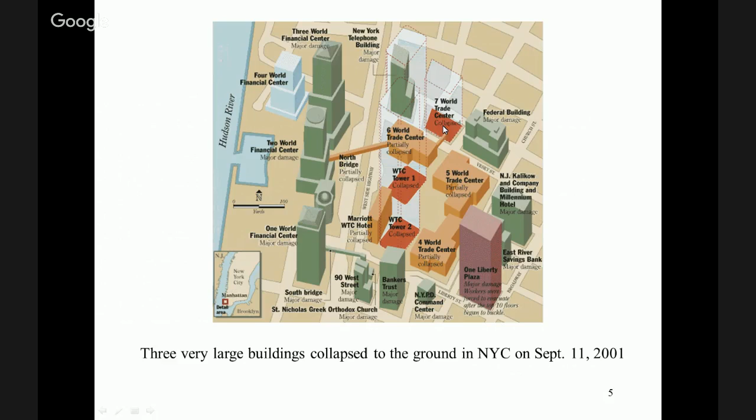So you see here the silhouettes of the 3 buildings that collapsed. You can see the 2 towers; they're in that one block. Building 7 is across Vesey Street. It was 350 feet from the closest tower, which was the North Tower, the second tower that collapsed.

It was shaped in a trapezoidal way. You can see it was 320-some feet on the long side and 247 feet on the shorter side, and then 144 feet wide. A football field is roughly 300 by 150.

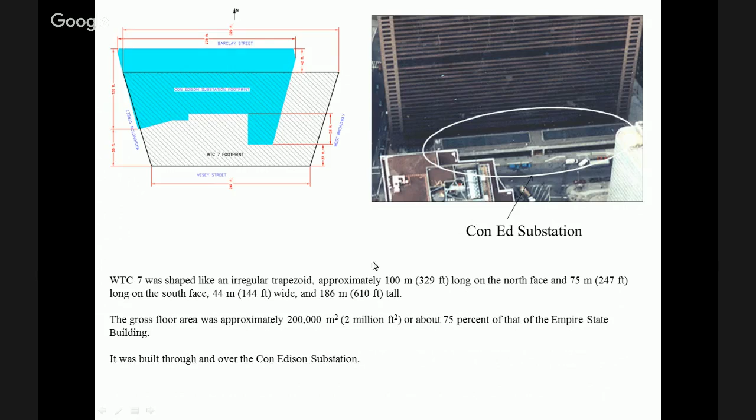It was built through and over an electrical substation. You can see on the right that it juts out — it was like the first 2 stories of the back of the building, the north side. The blue overlay in the upper left is the substation footprint, covering the first 2 stories. You also see the overlay of the foundation caissons showing they were supported through the Con Ed substation. It wasn't a cantilever over the substation — it was built through it. So the substation was essentially like the first 2 stories of the back half, and there was a ramp.

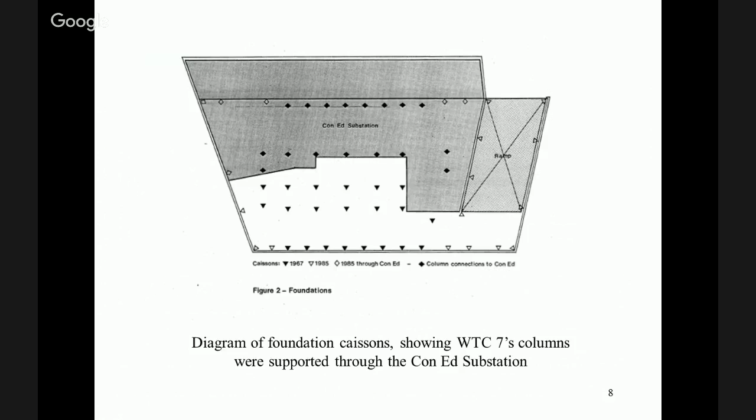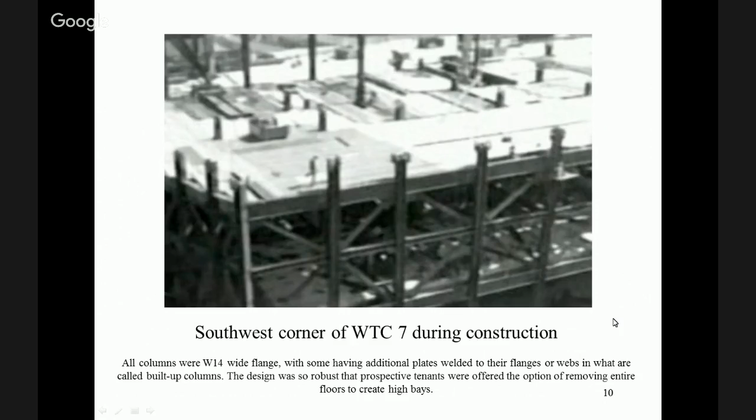The design was so robust that prospective tenants were offered the option of removing entire floors to create high bays, which was done up higher in the building. Here you're seeing half of the building with these two views, looking down the north interior side and the east interior side. Bear in mind you'd also have a south side that was longitudinal and a west side, so you're seeing half the volume of one floor here.

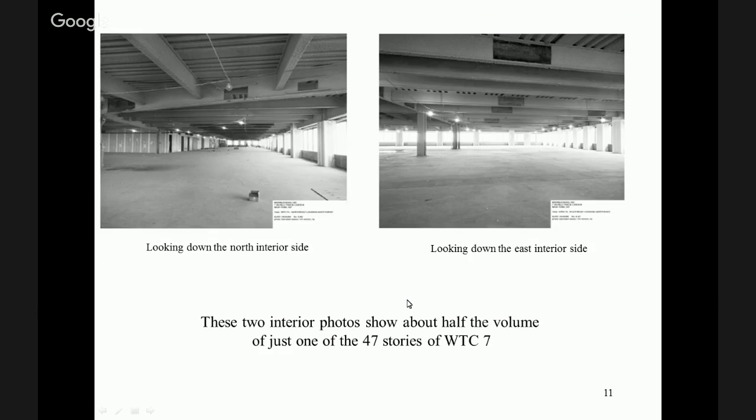There's a video record, we're going to show some videos here, and they're pretty short. I'm going to show these over again, I don't know if it loads well enough. It looked like there was some lagging there. Let me try this real fast. Oh, it still lags, okay. I think everybody gets the idea. Let's see if this one works better.

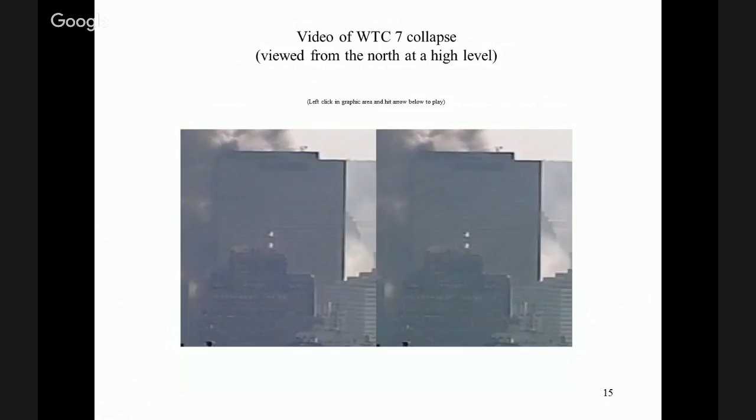And we'll show you this one. This is a high shot, taken from another building, and you'll see the east penthouse go in.

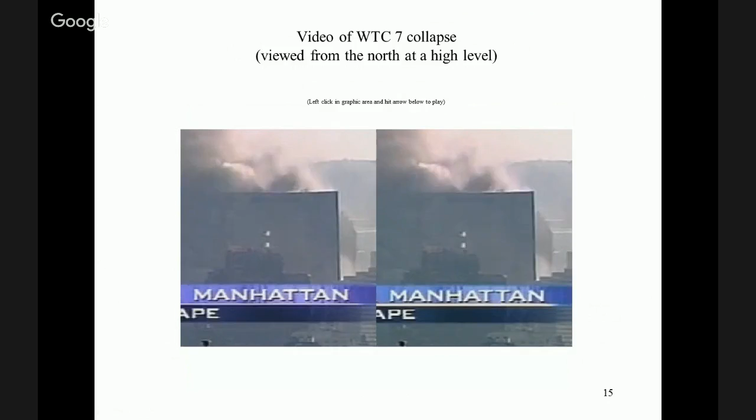The video seems to be lagging, but you can see it, it's actually doing a slow motion. It doesn't collapse that slowly, but you can see that the core isn't all the way down, the interior is not all the way down when the exterior starts to come down. So that's good to see.

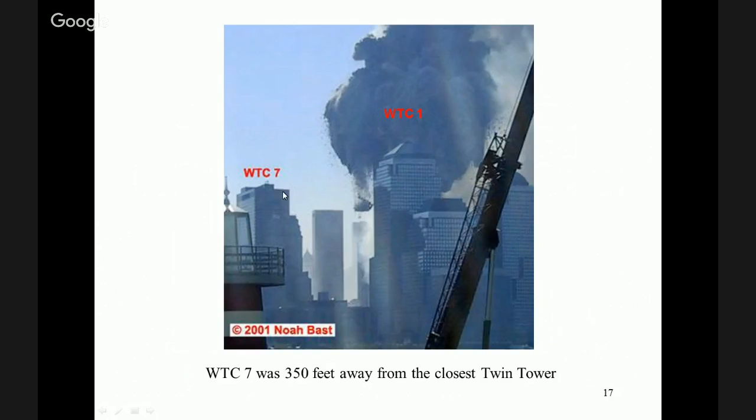Regarding the effects from the Twin Tower collapses, you can see it was 350 feet away. Here's World Trade Center 7, here's the North Tower, also known as World Trade Center 1. You can see a large exterior panel coming off, probably 60 to 80 feet away from the building. It's quite a ways from the 47-story World Trade Center 7, that debris.

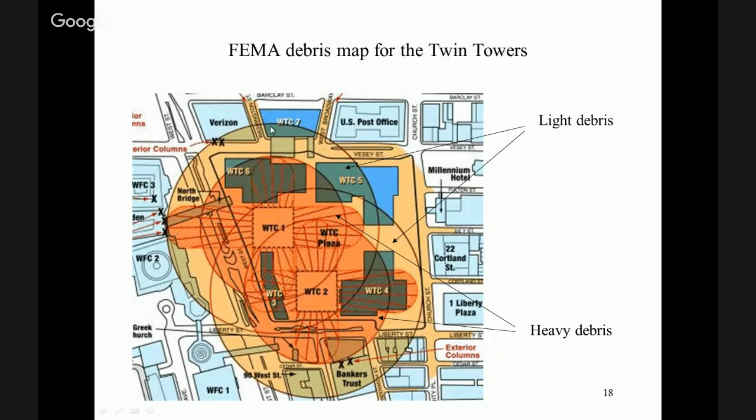This was a map developed by FEMA, the debris map, and you can see World Trade Center 7 is in the light debris zone of World Trade Center 1. These are various pictures from the NIST report showing the damage. There's not tremendous damage. This one, the southwest corner, did take some kind of hit, but bear in mind this building is a football field in size. If a corner of your house got chopped out, a couple feet, it's probably not going to cause the whole house to collapse.

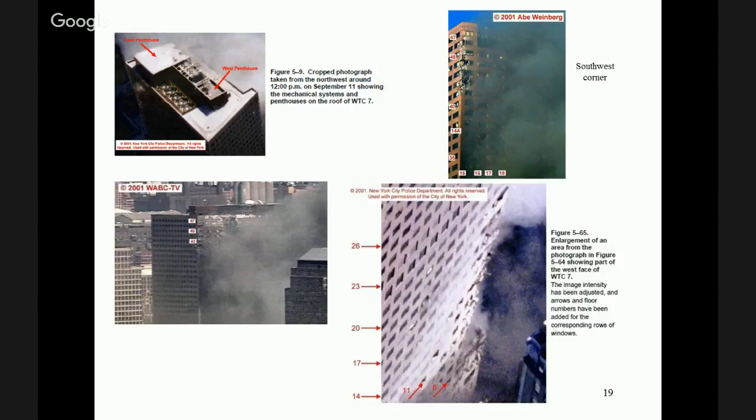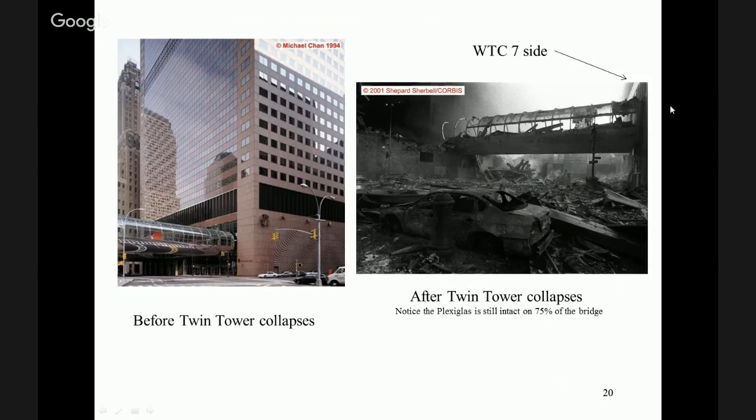Here's the bridge, a walkway bridge from building 6 over to building 7, before the collapses, and here's after the collapse. World Trade Center 7 would have been on the right. You can see that's plexiglass, and much of it is still intact. It would have gotten hit here, and you can see it was blown out. There wasn't much damage over this side.

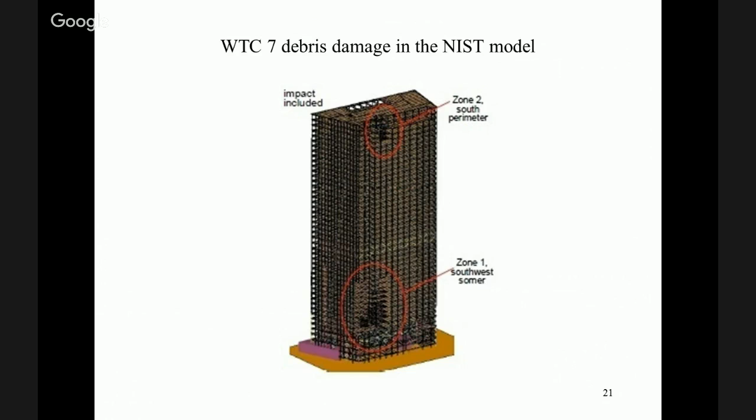They said 7 columns were severed. That's unlikely, you'd have to have a tremendous hit by something like a 10,000-pound item to shear those columns. Those calculations have been done.

This next slide shows other buildings we all know about that took serious damage. Up in the upper left is the Oklahoma City building, which took a serious bomb blast, or numerous bomb blasts, we don't know. At any rate, probably a third of the building is blasted away, and the thing's still standing. Next to that is the Khobar Towers barracks, same kind of thing, a 5,000-pound bomb blew off the face of the building, and it's still standing. The Bankers Trust and the other four pictures are from 9/11.

Serious damage, even the lower ones, World Trade Center 6, 3, and 4 respectively. They were massed, in the same block with the towers, basically right under them. They took tremendous impact damage, and there was no total collapse to the ground.

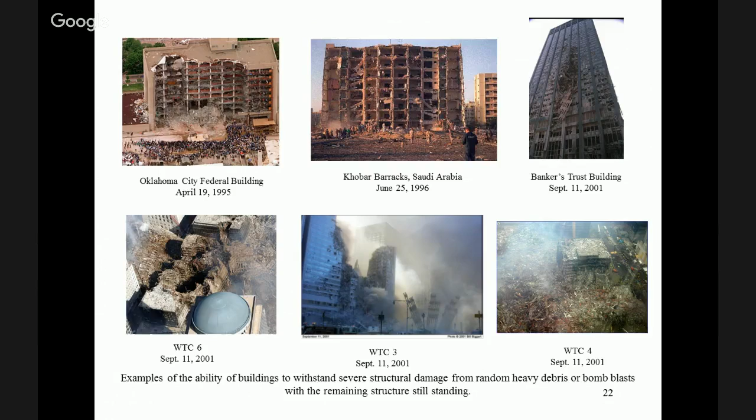So let's look at what kind of fires. They're saying World Trade Center 7 came down by fire, as that's what the NIST report claims. So let's look at the photographic evidence of fires.

Bear in mind that North Tower came down at 10:28 a.m., the second tower that collapsed. The first tower was at like 9:57. North Tower, which was closest to Building 7, came down at 10:28. There is no photographic evidence of any fires in Building 7 before 12:15, an hour and 47 minutes later. Very peculiar, and I think that's suspicious.

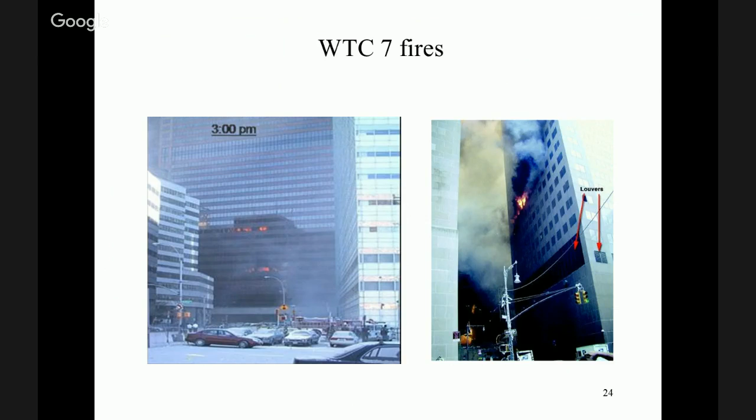So here you go, you're seeing the fires. They don't claim that diesel fuel had anything to do with the fires, as most of the fuel was recovered from the tanks below ground level. FEMA had initially implied that there was a good bit of diesel fuel on the premises, but that would have a low probability of occurrence having caused the collapse. But it turned out they recovered most of that fuel in tanks underground.

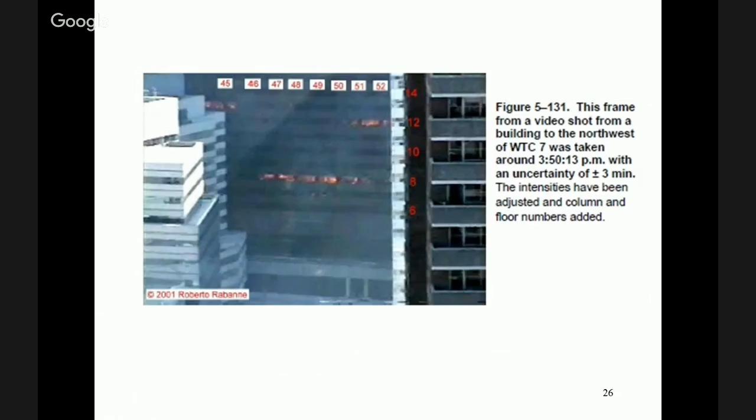You can see there's been numerous fires, we've been building high rises since the turn of the last century. And there's been numerous fires, including the North Tower in 1975, had the fire on somewhat 6 to 9 floors. There were lower floors, and there was no serious structural damage. It was basically a cleanup.

It was a 3-hour fire, but these fires were pretty hot. You can see they were quite hot. This one in Caracas as well. This is in Philadelphia, in my area. I remember this.

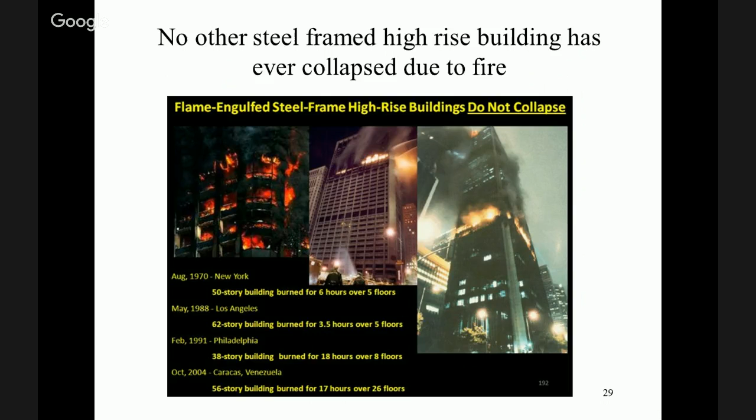The building stood. They finally took it down, but it burned for 18 hours, no collapse. The one on the far right is the Interstate Bank building in Los Angeles. That burned for quite some time, for 3.5 hours. There were 5 floors, were pretty hot.

And here's Building 5, World Trade Center 5, right in the World Trade Center complex. You can see the fire during and then after. I mean, there's no sign of a collapse. Some partial collapse of an upper corner that may have been hit by tower debris also.

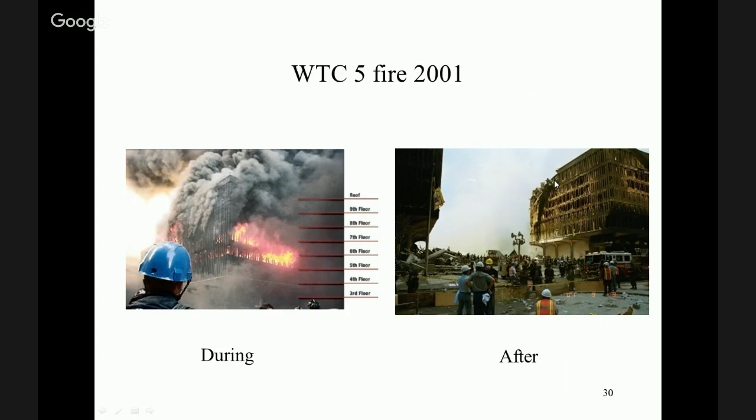And we've had a number of fires since 9/11, high-rise fires. Here's the Beijing Mandarin Hotel in 2009. See it before, during, and after, and during that's an absolute torch. And you can see afterwards that there was some concrete and there was a lot of steel, and you don't see the steel having collapsed.

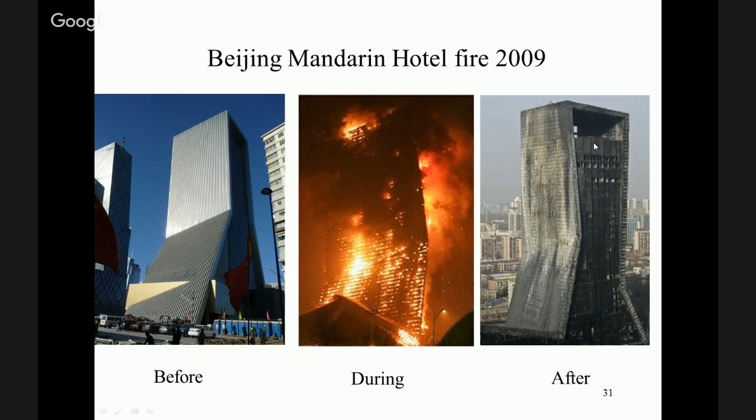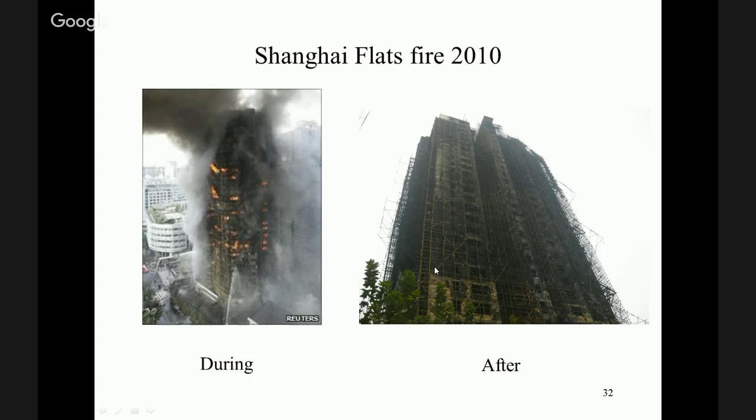Here's the Shanghai Flats, a year later, trying to give us another fire like this. And this building had scaffolding around it. The scaffolding didn't even collapse.

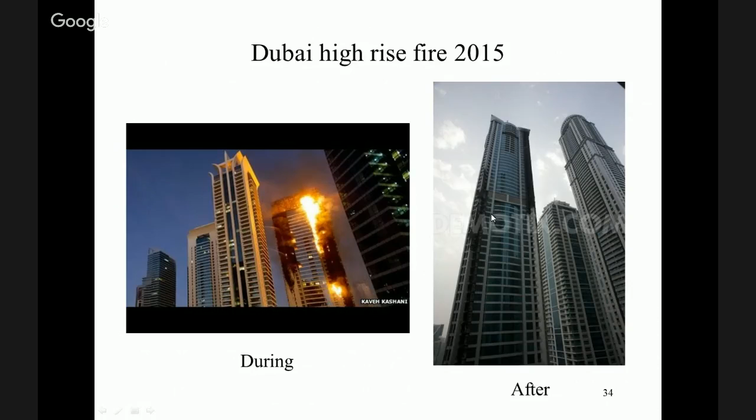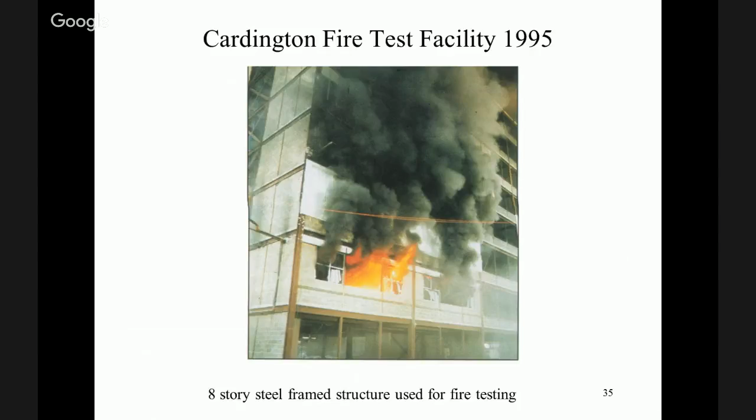There was a fire testing done on an 8-story steel frame structure in Great Britain in 1995, specifically to understand how steel frame reacts to fire, if there's a chance of collapse. There was no collapses. They did various test scenarios. You can see on the next, they had no fireproofing on the steel. You can see it sagging. Temperatures are up to 1,000 degrees C.

But what happens is, in a fire, the amount of energy available at any given time is not enough. There's not enough fuel to heat the large pieces of steel. There's a certain amount of energy you need to heat that steel up to a certain temperature where it's going to lose enough strength to fail, and that generally doesn't happen.

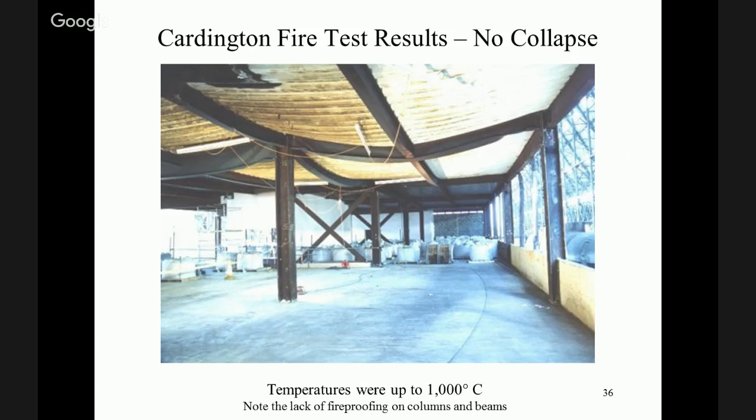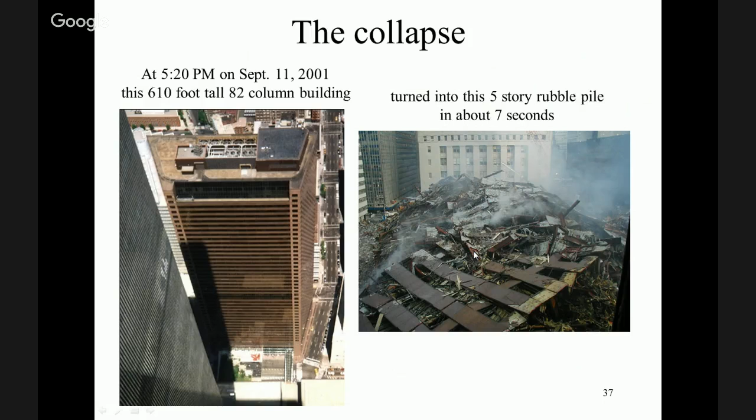On a large scale. But in the case of Building 7, you can see here, the 610-foot tall building with the football field area plan turned into a 5-story rubble pile. You can see that rubble pile is like, towards center, which means it was imploded. Everything was pulled towards the center. That's unique, and it's hard to imagine fire causing that.

So let's talk about the NIST report, investigation, and their conclusions. And they say that this steel superstructure collapsed due to fire. What's interesting to note is they say in their report that there was no metallography or metallographic analysis done on the steel from World Trade Center 7, because none of it was salvaged. I thought that was rather shocking when I first read that.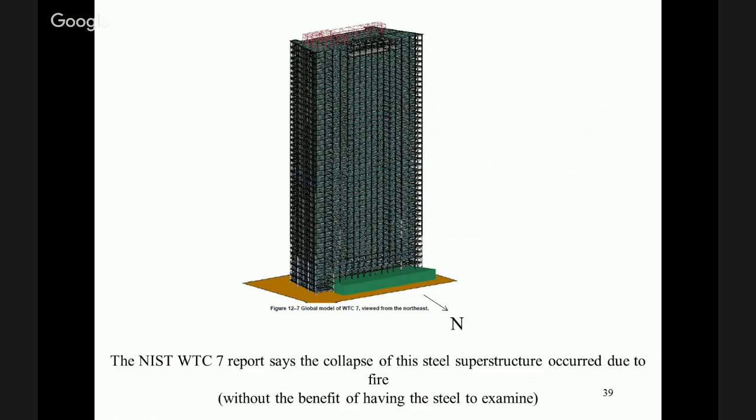This would have been allegedly, or purportedly I guess, the first steel frame high-rise building in history to completely collapse due to fire, and none of the steel was saved. Very strange, in the least.

So they say, this chart shows you what they say happened to initiate the collapse. They say these 5 beams - I hope everybody can see my cursor. Can you see it, Andy? Yes, I can. Okay, so everybody else should be able to see it.

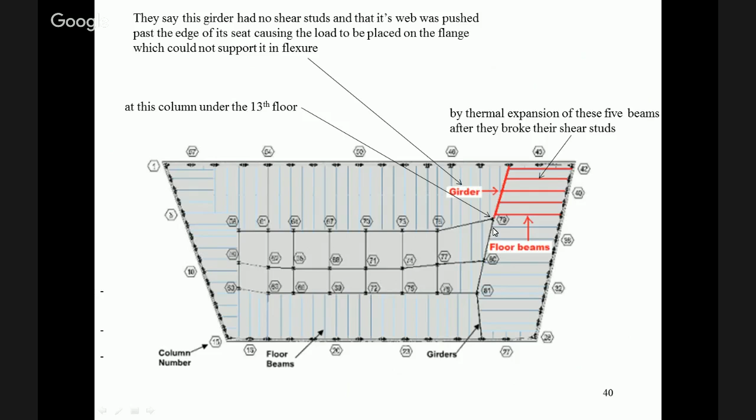So they say these 5 beams, in the northeast area of the building, expanded thermally and pushed this girder off its seat at this column, causing that floor area to collapse down in a cascading collapse 8 stories down, causing this column to be unsupported in the north. And they say these girders lost their connections due to thermal expansion for a large number of floors.

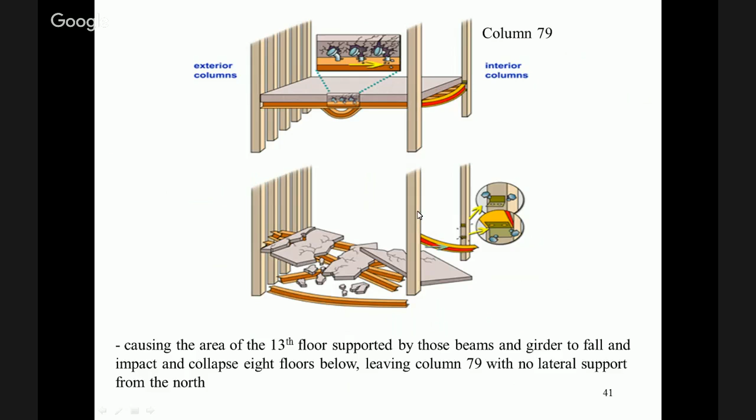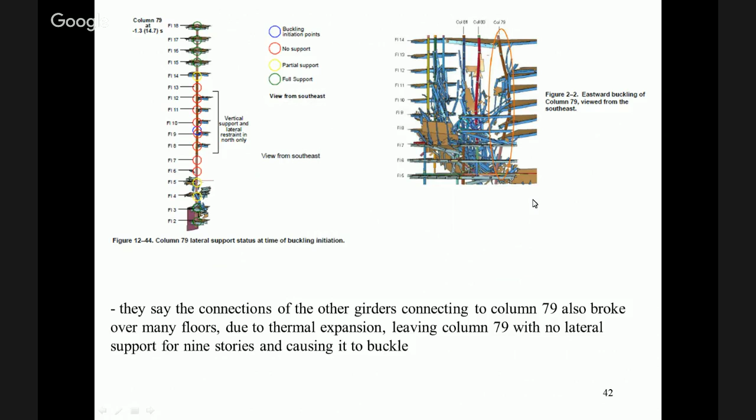Under the 13th floor is where they say it started. And of course, they say that the floor collapsed when this girder fell off its seat and that it cascaded down 8 floors. And that both the north and then the other girders, they say, lost their connections for about 9 floors. And column 79 buckled because of losing lateral support.

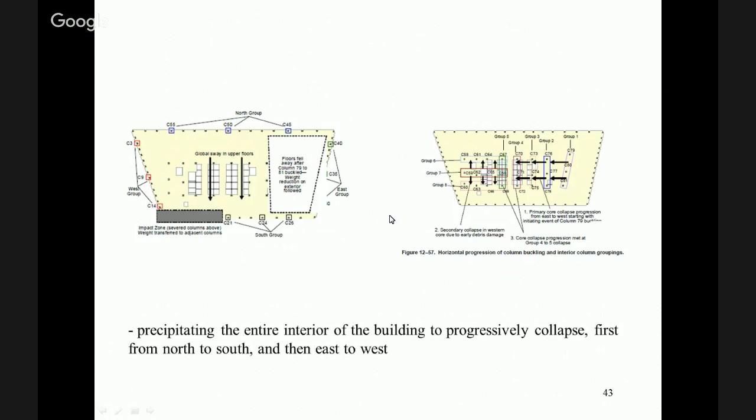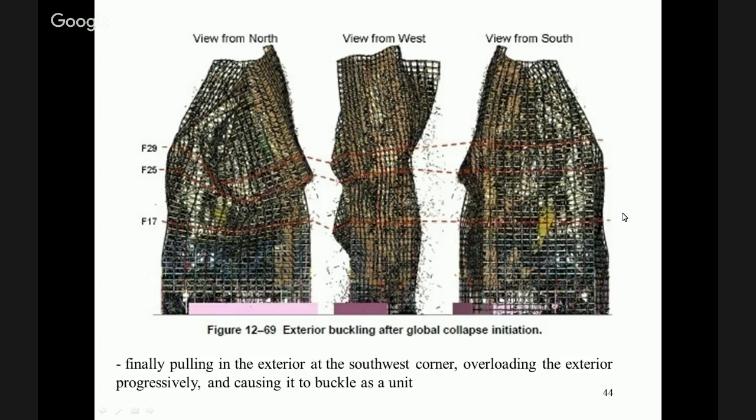And that collapse, going right to left here, started and caused column 80 and 81 behind it to collapse, and then there was a progression from east to west then in the interior, and that caused the exterior to be unsupported laterally, causing it to collapse. And these views are from the NIST model with quite a bit of exterior deformation that you don't see in the real collapse. So let's look at the problems with the NIST investigation and their conclusions.

There was a fellow at the company that did the work on the erected Building 7, called Frankel Steel out of Toronto. And this fellow, John Salvarinas, was a project manager, a program manager. And he wrote a paper in 1986.

And the reason this is important is because he talked about shear studs being on that girder that's being pushed by those 5 beams. NIST claimed there was no shear studs on it, even though in his paper he showed it. And earlier NIST said most of the beams and girders in their draft report in 2005 were made composite with the slabs through the use of shear studs.

Typically the shear studs were 3/4 inches in diameter by 5 inches long, spaced 1 to 2 feet on center. That would correspond with what John Salvarinas said. In 2008, in their final report, NIST said there were no shear studs on that girder.

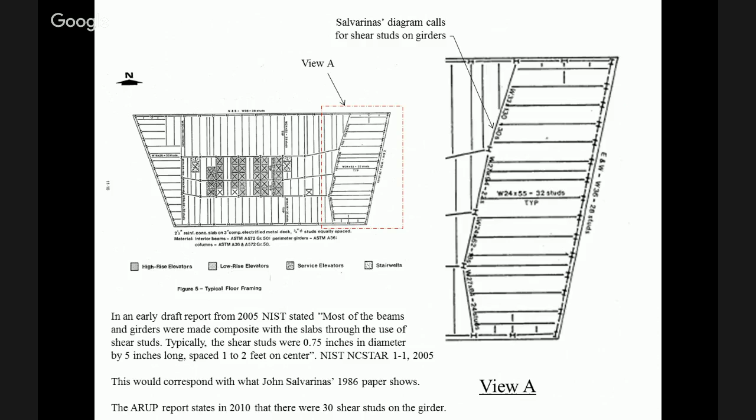It turned out there was a group that was commissioned to do a study on this in 2009 and 2010, called ARUP Engineering, for a Con Edison and Aegis Insurance Company lawsuit against the owner of Building 7, and they determined there were shear studs on that girder. So I don't know where NIST was getting the information.

There wasn't. And here's a typical installation of shear studs. You can see they're on the top surface of every beam and girder.

And the next thing we find in the NIST report is they say this is the girder sitting on its seat at column 79, a back view. And right below the bottom flange of the girder is the seat, which is actually 12 inches wide, and the vertical plate that is welded to the column that it sits on.

And NIST said that seat was 11 inches wide in the report at first. When the drawings were released in early 2012, it turned out the seat was 12 inches wide.

That's important because the beams framing into it were 53 feet long, and they could only expand 5.5 inches at 600 degrees centigrade - about as hot as you could get them. And even then, they couldn't expand more than 5.7 inches ever, because once you get above 654 degrees C, sagging causes them to shorten more than they expand.

So they can't get the girder web past a 12-inch seat. So they just said in an erratum that yes, the seat was 12 inches wide. Now, the travel distance - instead of 5.5 inches they claimed earlier, they said it was 6.25 - but they didn't explain where they got that extra expansion.

So the seat, they said, they just made a mistake, and they transposed the longitudinal with the lateral travel distance. That's sort of hard to take. The longitudinal distance was 6.25 - that's how far the girder sits on the seat. So I don't see how they transpose it. But that's what they say they did.

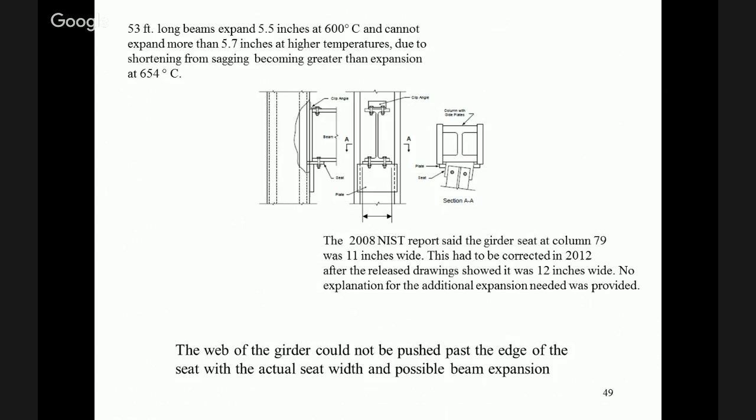So this is a top view of those beams sitting on their seat inside the east side columns, which is the exterior.

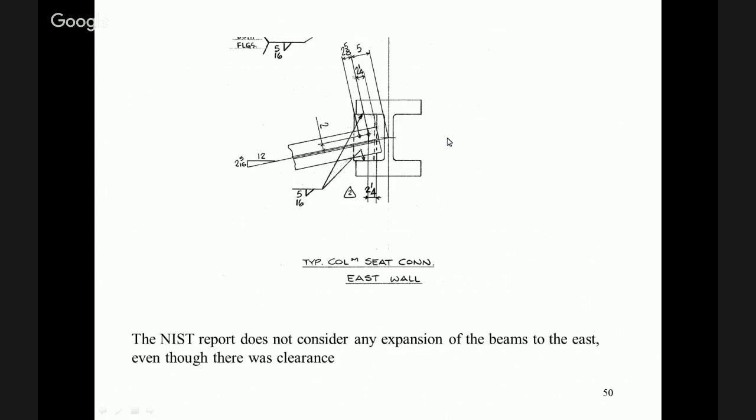They claimed they did not consider any expansion of the beams to the east, only to the west, to push the girder. You can see there's clearance here, you can see my cursor right here. There's clearance. These bolts would have broken, 28 shear studs would have broken.

3/4 inch shear studs would have broken like NIST said they did. So in addition to the seat width being distorted from 12 to 11 inches, the NIST report completely omits stiffeners on the end of that girder. They say this girder was pushed to the west and that its web would be past the seat, with all the load on the flange, and the flange couldn't handle the load in flexure.

Well, that's true. But if those stiffeners were there, and you can see them here, they were found in this assembly drawing of the girder to the column, when the drawings were released in early 2012. You can see these stiffeners. They're 18 inches high by 5.5 wide, 3/4 inches thick.

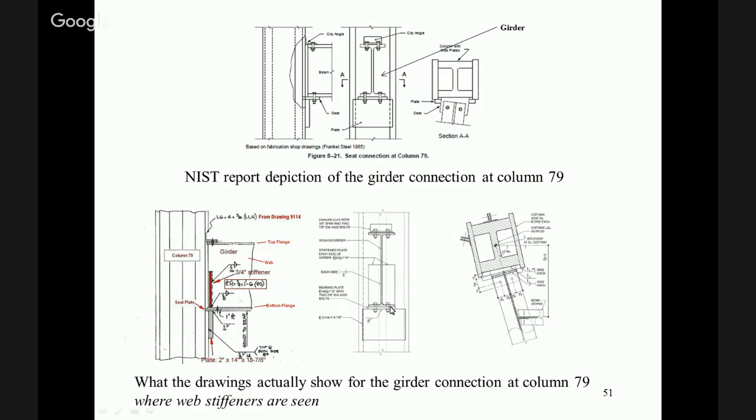They extend from the web all the way out to the flange, and they're partial height 18-inch high stiffeners. They would stiffen that flange tremendously. Here's the NIST model with no stiffeners, and here are the stiffeners in a 3D model.

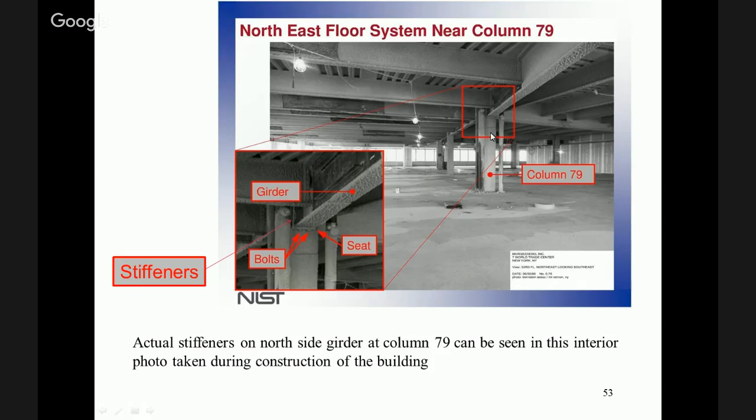You can also see them in photos. This is a photo zoomed in. Here are the stiffeners, this is an actual photo of column 79, and that's the girder in question. Here are the beams framing into that girder.

Here's a little analysis showing that the section modulus of the stiffened flange is 79 times that of the unstiffened flange. This is a cross section looking at the stiffener from the side, and this would be the flange. The 6.25 inches is the bearing distance of the flange on the seat, and here's the 18-inch high stiffener. This cross section is significantly stiffer than just an 855 thick flange, 5.25, 5.5 inches wide.

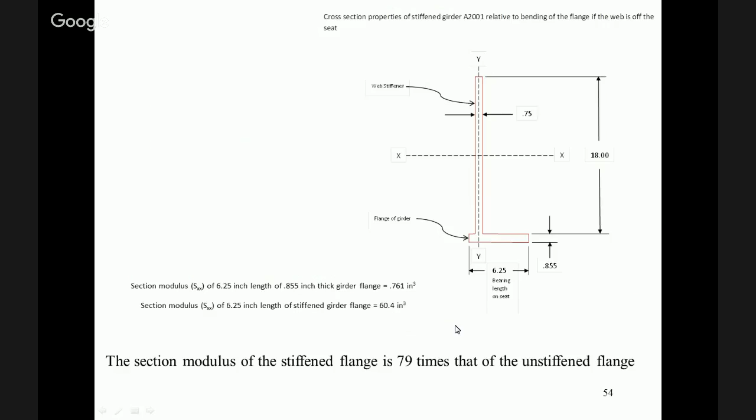This is a finite element analysis showing that if the web of the girder with the stiffeners was off the seat, it's very low stress, in the 7,000 to 10,000 range. You can see that. And if this was happening with the girder at 500 degrees, as NIST stated from their fire simulation, you still have 70% of the steel.

Failure would not ensue until a 35,000 psi stress was reached, because that steel was ASTM A572, with a yield strength of 50,000 psi. At room temperature and at 500 degrees, it would still be 35,000. So you're well off of that, you'd have to be up here in the reds, but you're down here. You probably have a 4-to-1, even 5-to-1 factor of safety, even at 500 degrees centigrade with those stiffeners on there.

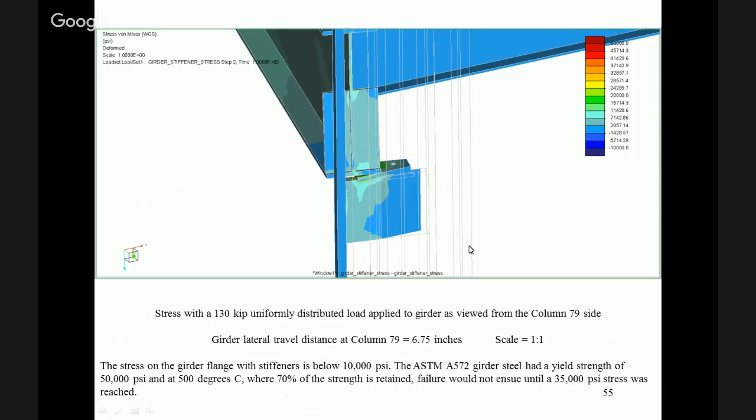They don't explain that, they just assumed it was able to be pushed to the west. And like I said, they left the stiffeners off, which would prevent the flange from failing to begin with even if it was pushed further, and they distorted the seat width.

They try to say that the connections on the south and west girders all failed due to thermal expansion. Pretty hard to have happen, and ARUP's analysis shows they didn't fail. But there's another interesting point: there were fires on floors 7 through 9 and 11 through 13, but none on floor 10. So you couldn't have thermal expansion failures on floor 10.

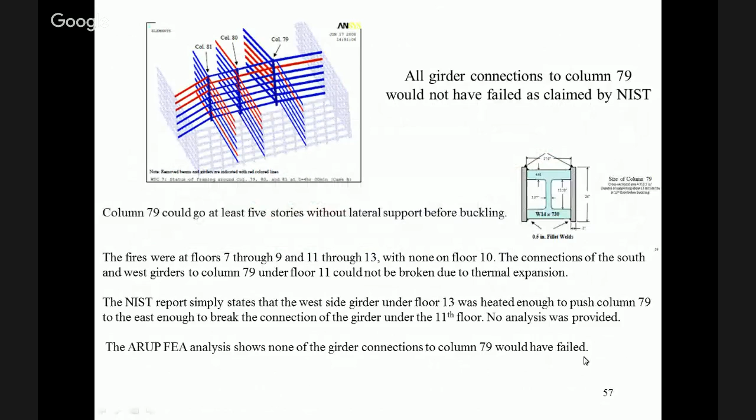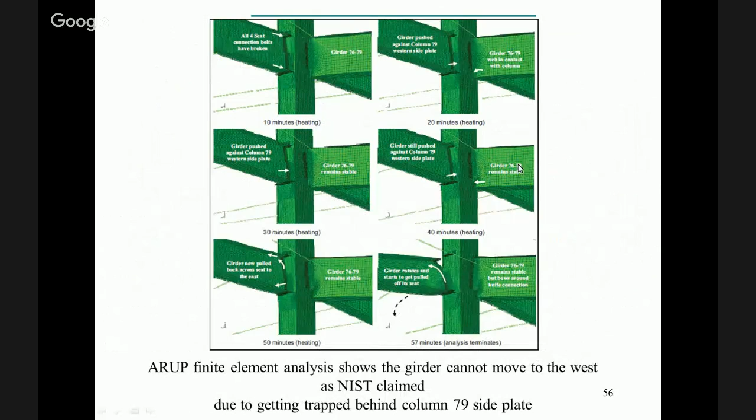So even if the girder did fall, ARUP did say that it was pulled off to the east instead of pushed off to the west when it cooled. So even if it did fail or fall, it would have hinged the floor. That floor area would have hinged down like this. This would be column 79 here. But the floor area was still connected to the north and east side.

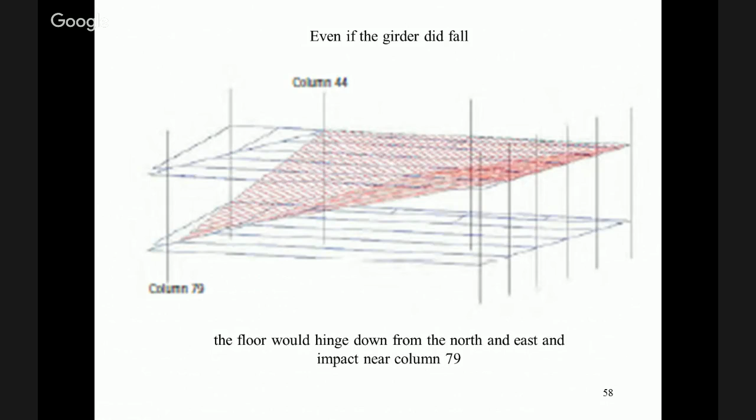So what happens there, to find out the impact load, you have to know the frequency of that system. And ARUP actually did an analysis. NIST didn't. They just made the assertion that the floor impacted the next floor down and you had a cascading floor collapse. They did not provide an analysis. ARUP did, and then they made a mistake by considering the stiffness of this beam and girder assembly to be infinite by using a point load. That's not true. This beam and girder assembly would deflect, and that's going to change the impact loading significantly.

And here you can see there's a natural frequency analysis, the frequency of this girder with the 5 beams. The girder over here was just sitting on its seat because it had broke the 4 bolts on the bottom of the girder on the seat. These beams are still connected with their bolts, and there's 3 short lateral support beams connecting this northmost beam to the girder on the exterior.

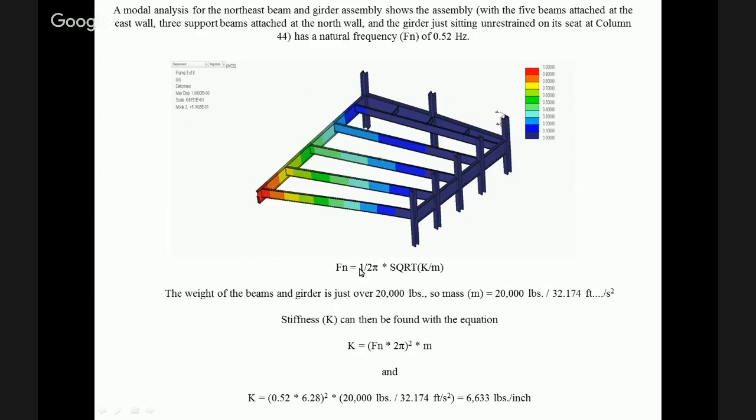So knowing the natural frequency and the mass of this beam and girder assembly, which is 20,000 pounds, you can find the stiffness, and you need that stiffness, which you can find through this equation, knowing natural frequency and mass. You can do equations, like spring equations. The energy is equal to 1/2 kx squared. In this case, the x is the deflection. The potential energy is the energy of the whole mass dropping over 120 inches or so.

ARUP used 3,473,000 inch-pounds. The deflection would be 32.4 inches with that stiffness that I showed here. 6,633 pounds per inch is what this beam and girder assembly would deflect. For each 6,633 pounds, it would deflect an inch. And the deflection turns out to be 32.4 inches with that potential energy, manipulating the equation to determine deflection based on known potential energy and stiffness.

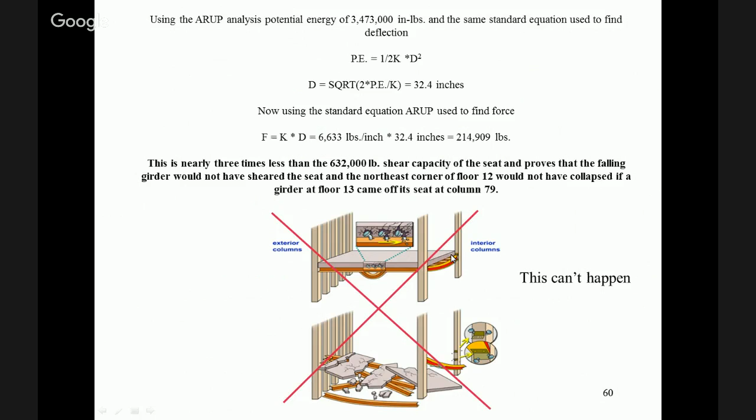And then finally, you can come back and get the impact force, knowing the stiffness and deflection. And that's about 215,000 pounds. To shear the seat at column 79 would require 632,000 pounds. So it's 3 to 1 off, and this amount of energy is somewhat conservative, it's high. So you can see that it's not going to happen. You can't, when that floor, even if it did fall, it wouldn't break through the next floor down.

So there's a number of false assumptions used in this World Trade Center 7 report to make its collapse initiation hypothesis seem plausible. That's no shear studs on the girder. We found out that's not true. They claim all the expansion of 53-foot long beams was to the west. That wouldn't be true. If the girder seat they said was 11 inches at first, we found out that wasn't true. They had to admit it.

They omitted the girder stiffeners, which would have stopped the flange from failing if the web were to go beyond the seat. The thermally expanded girder, they allowed for it to move past the column 79 side plate. ARUP's analysis shows it can't, and even a hand analysis will show that.

They claim the west and south girders at column 79 had their connections broken. The ARUP analysis shows they wouldn't be. The northeast floor failure cascades down at least 8 floors in their analysis without any calculations shown. The ARUP calculations are an error there, and it shows they wouldn't cascade. You can't break through the next floor. So it seems the NIST report, the basis for it, has crumbled.

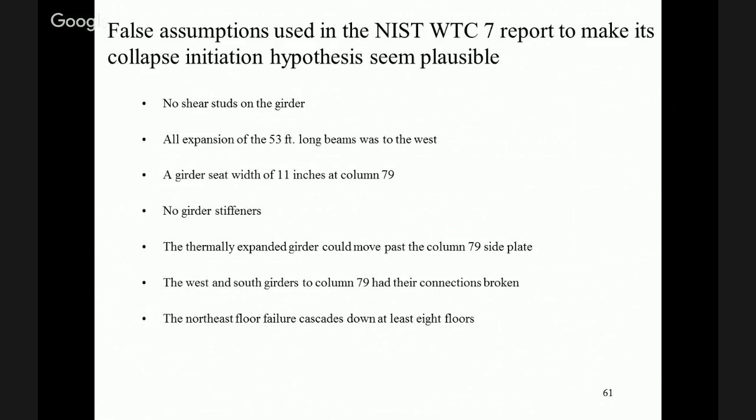They also had an alternative failure mechanism in their report, and they omitted other pertinent structural features—specifically these 3 lateral support beams that are there to support the columns on the exterior, coming off this northmost beam that's framing into the girder they say failed. These are the omitted lateral support beams.

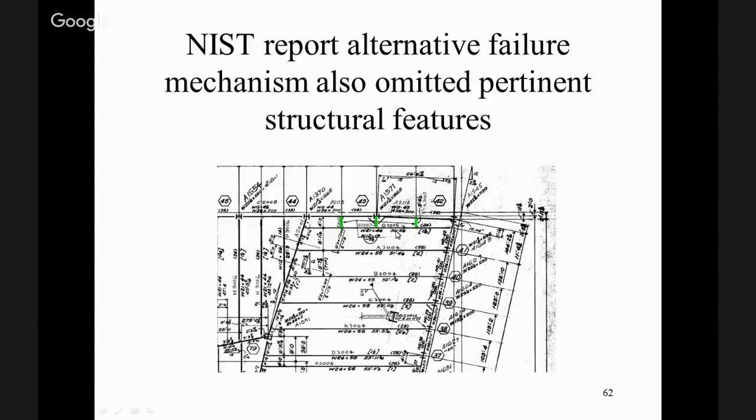You can see this is the NIST analysis in their report. There are no lateral support beams shown, and you can see they say that northmost beam failed in buckling and lateral torsional buckling. There are no support beams in their model, and they make a big difference.

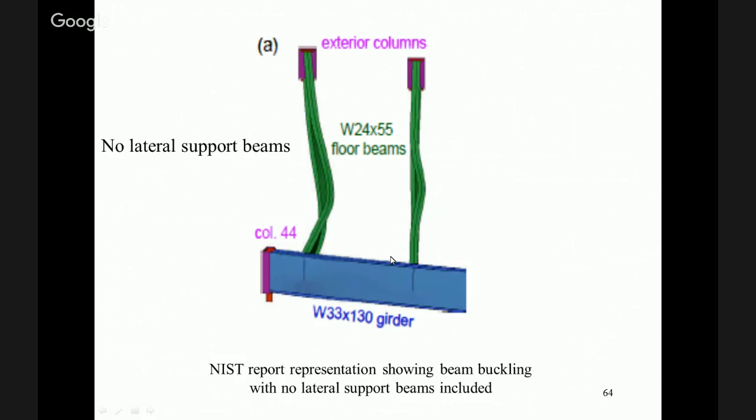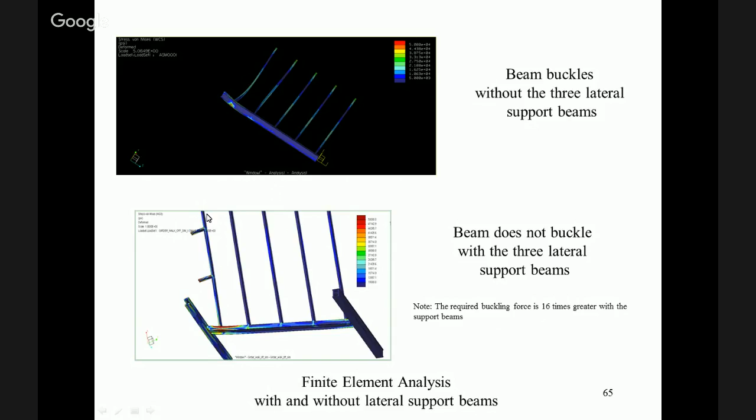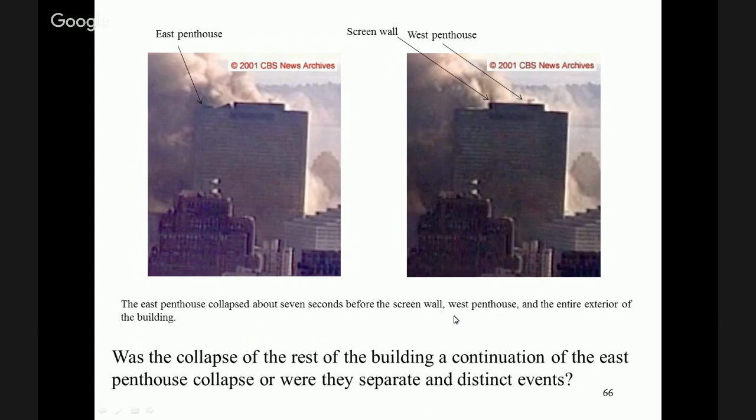Something interesting happens at the beginning of the collapse: as you saw, the east penthouse collapses, and then a few seconds later the rest of the interior starts going down, followed by the exterior. So we're wondering what's going on with this east penthouse—was the rest of the collapse a continuation of that penthouse collapse, or were they separate and distinct events? Let's look at it.

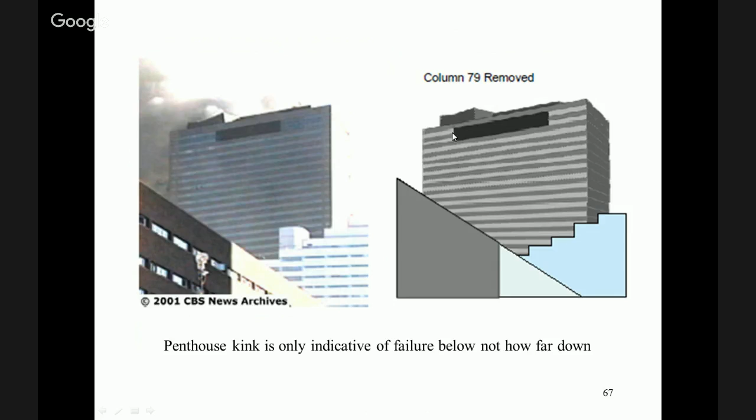NIST looked at this, and there was a kink. This is from the video in the east penthouse, and they say they removed column 79, and that's fine—they got that kink, but that doesn't tell you where column 79 was removed. It could just as easily be removed high in the building as well as down low, and you could get that kink. So that's only indicative of column 79 failure somewhere in the building; it doesn't tell you where. But let's look.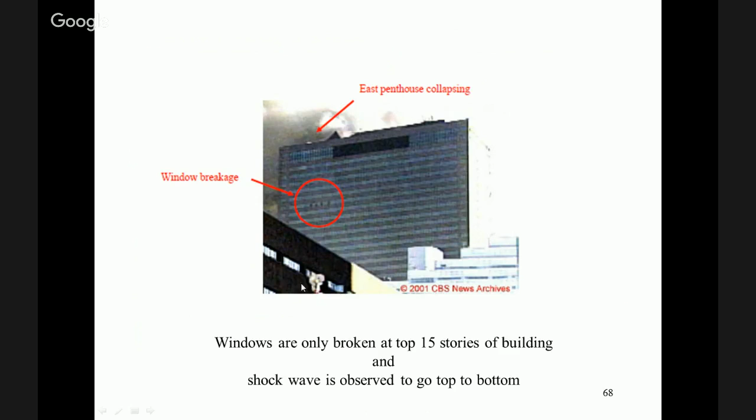There's only daylight visible in the upper windows. The building was 144 feet wide. If that whole east side interior had collapsed, I would think you'd be able to see daylight at least down 5, 6, 7 floors. You don't—it's only up top.

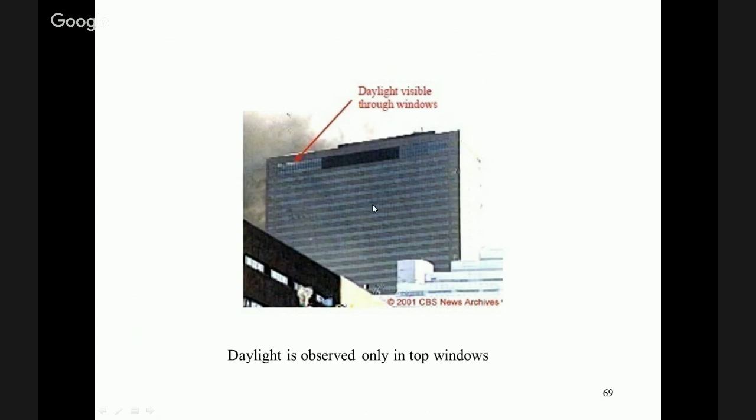And there was no dust emanating when this alleged full east side interior collapse—that NIST claims was happening when the east penthouse collapsed—occurred. You don't see any dust until the full exterior comes down. That's telling me that it's the east penthouse only collapsing up top.

Let's look at this video and you'll see—they're saying this whole thing collapsed like this before the exterior collapse. This is the interior, because they're talking about core columns here. So let's look at this video.

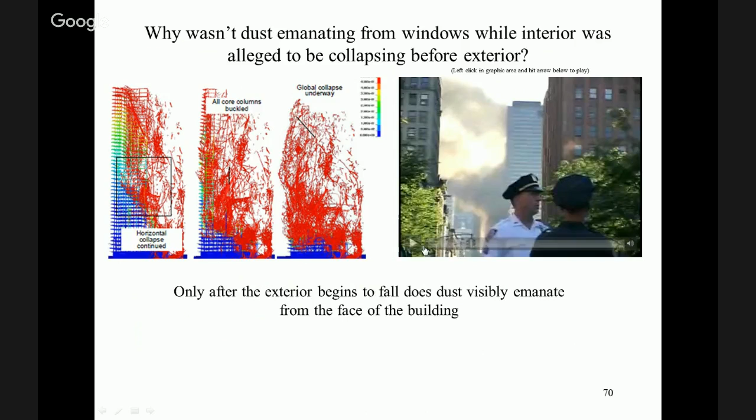They're going to do a close-up—watch when it comes down. You don't see the dust until the exterior comes down. If the whole interior on the east side had been collapsing, you'd have seen dust come out of those windows during that time. In addition, there should have been deformation of the east side exterior—there's not, until the whole thing comes down. It never really deforms on the outside.

So we're asking here, how can the core have been completely collapsed before global collapse? Again, this is interior core collapse—this is NIST's words here. This is the core—they're saying that's what happened before the exterior. Now let's watch this video and see if you think the core collapsed before the building. I'll play this again, and then I'll show you some other slides too.

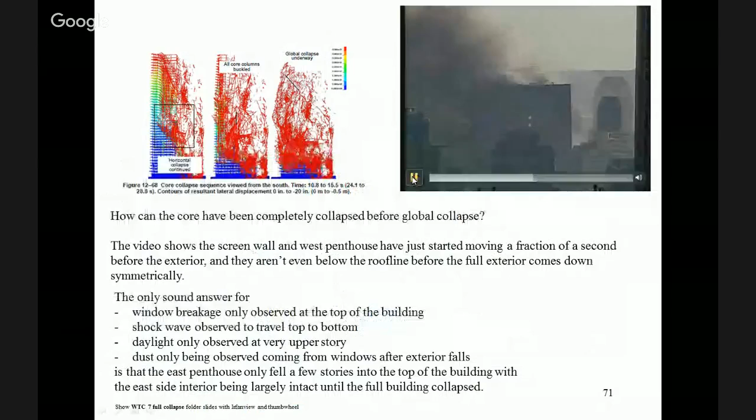Okay, and we're going to go back to the full screen. The video shows this here, again real quick, and that's what I just showed you the separate slides from. It shows the screen wall in the east-west penthouse, the area between the east and west penthouses. It started moving a fraction of a second before the exterior, and they aren't even below the roof line before the full exterior comes down symmetrically.

The only sound answer for window breakage only observed at the top of the building, shockwave observed traveling top to bottom, daylight only observed at very upper stories, and dust only observed coming from windows after the exterior falls on the east side, is that the east penthouse fell only a few stories into the top of the building, with the east side interior being largely intact until the full building collapsed.

And that's what I believe happened. I believe the entire core was intact except for the very top of the east side, and that the core was taken out over 8 stories, something like that. And that's why you got a symmetric collapse, when that core collapsed and pulled all the exterior columns in.

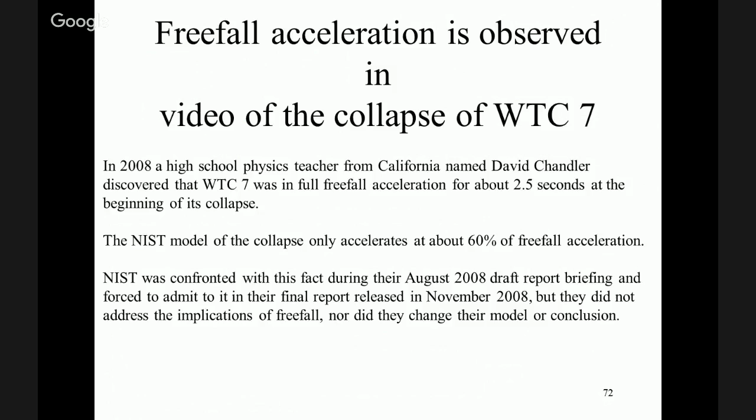In 2008, a high school physics teacher from California named David Chandler discovered that World Trade Center 7 was in full free fall acceleration for about 2.5 seconds at the beginning of its collapse. The NIST model of the collapse only accelerates at about 60% of free fall acceleration. NIST was confronted with this fact during their August 2008 draft report briefing. David was able to ask that question and they were forced to admit to it in their final report released in November 2008. They did not address the implications of the free fall, nor did they change their model or conclusion.

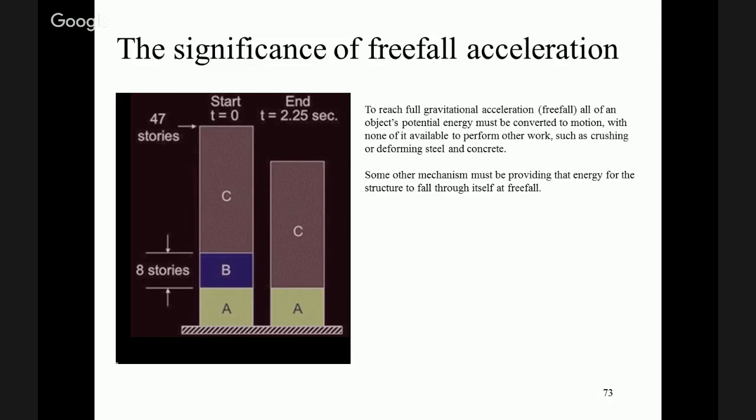That's interesting. One has to realize, to reach full gravitational acceleration or free fall, all of an object's potential energy must be being converted to kinetic energy or motion. None of it is available to perform other work, such as crushing or deforming steel and concrete. So some other mechanism must be providing that energy for the structure to fall through itself at free fall. Again, it was in free fall for 8 stories, and they admit to that, but they don't address the implications. And they changed David's 2.5 to 2.25 seconds, which isn't significant.

Now here's a video, like I said, where you don't see the deformation in the real video that you see in the NIST model, which has things failing across the floor causing all this deformation. So let's look at it. This is a 2-minute video that shows the contrast between both.

And I hope it plays fast enough.

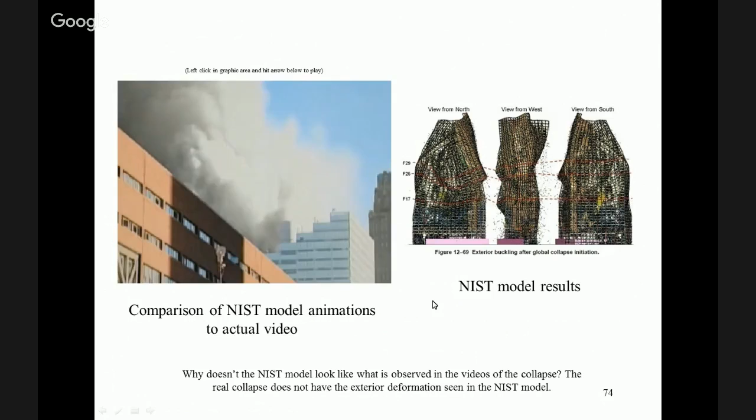Here's the real video. I don't see this kind of deformation there. There is a kink in the north face, that would have happened when the core was taken down. The descent is basically symmetrical.

And here's the NIST model. They did two models, one with and without debris damage. You're going to see their failure is going to start in this area, where they say it started when that girder was pushed off its seat. That couldn't happen if they didn't omit certain structural features.

And they're showing this whole east side coming down, but you don't see any dust coming out of the windows. Very peculiar. I think just the penthouse collapsed up here, and not all the core columns came down, yet the whole exterior came down. That's what they're saying happened. Doesn't seem to make sense.

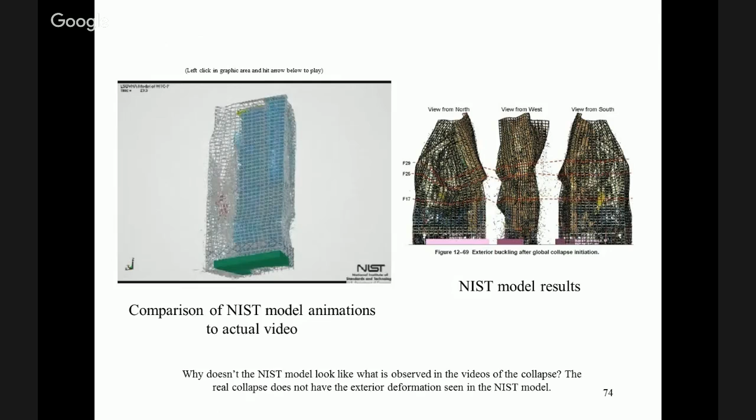So the way they say the exterior came down is rather unique. They say the interior columns buckled across the building, the exterior columns were left laterally unsupported, and that the exterior column buckling spread column to column sequentially as the loads were redistributed, and that this happened over 2 seconds.

I'm going to look at this video. 2 seconds at free fall is over 64 feet, or about 5 stories. So if that were true, it would start on one corner of the building and come down first rather than the other. But it looks very symmetric.

It's even with the horizon. I just can't buy their story, looking at this video and others like it. We'll play this one more time, and I think everybody would get the idea. It's simultaneous—that can only be done with charges.

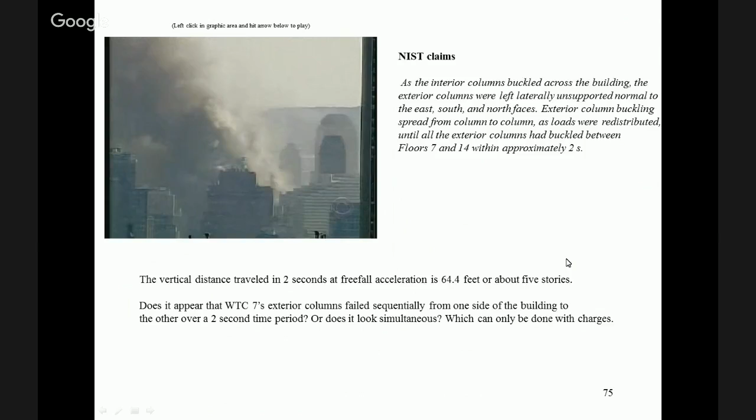So what is the most likely cause of the collapse of World Trade Center 7? As I showed, the NIST report explanation for the collapse consists of a series of impossible occurrences, especially if you include the items they omitted that were structurally significant. Fires could not have caused the observed symmetrical free-fall collapse of the building across its full length and width.

So what is the problem with saying the collapse of World Trade Center 7 was the result of controlled demolition? Well, the charges could not have been set on September 11, 2001, while there were fires in the building—they would have to have been pre-positioned. This would indicate the collapse was a planned event, not the result of random damage due to unforeseen events such as aircraft hijackings, impacts, and the Twin Tower collapses.

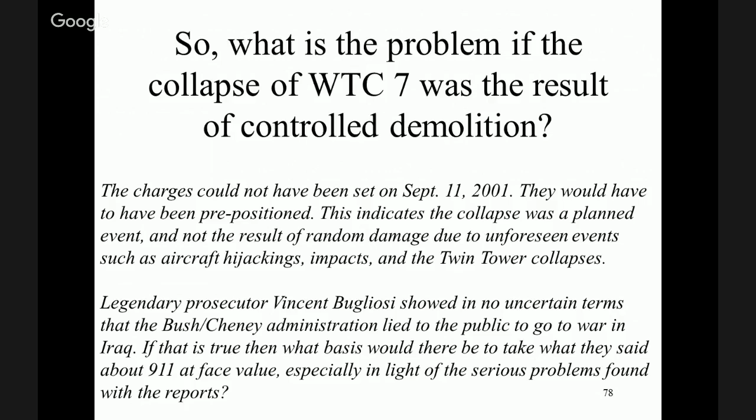There was a legendary prosecutor, Vincent Bugliosi, that some might remember—he's the one that prosecuted Charles Manson. He prosecuted 22 murder trials and never lost one. He wrote a book in 2008 that showed in no uncertain terms that the Bush-Cheney administration lied to the public to go to war in Iraq. If that is true, then what basis would there be to take what they said about 9/11 at face value, especially in light of the serious problems found with the reports?

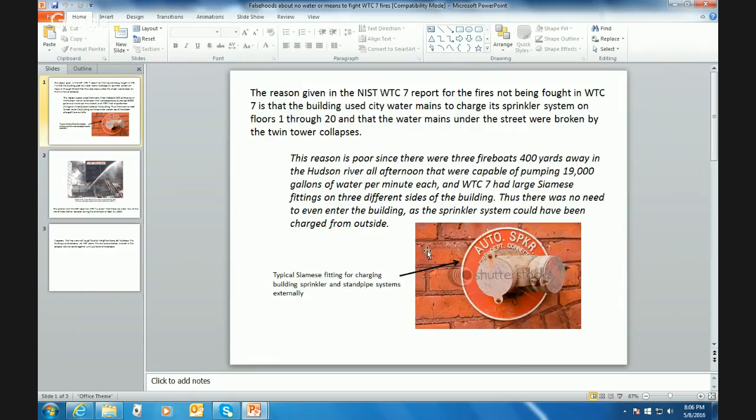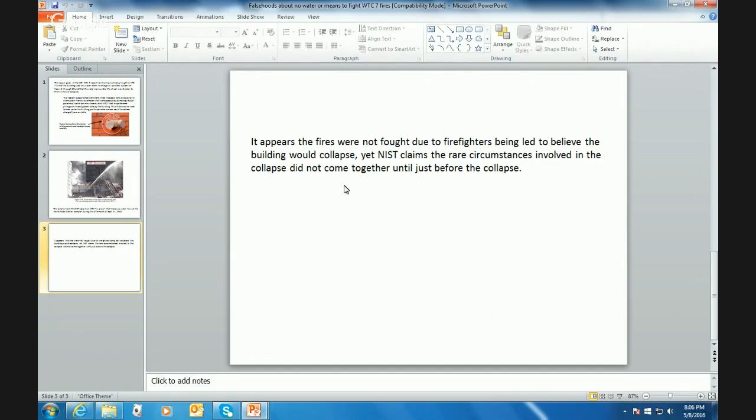Well, thank you for that, actually. Those are excellent additions there.